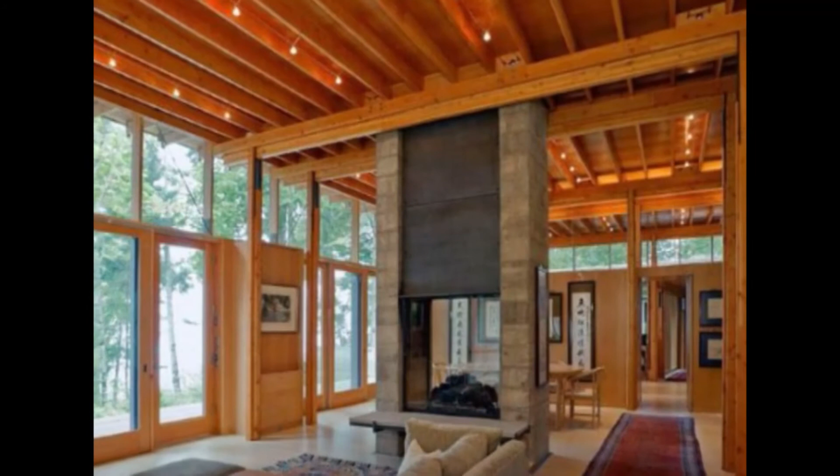Preparation and application of coating is an important industrial activity in the modern world. You can see exterior and interior of any building, vehicle, and substances of daily use are coated.

In this lecture, we will be learning about the unit of surface coatings: its historical background, importance, types of surfaces which are coated, objectives of surface coatings, and various types of coatings which can be classified as conversion coatings, thermal coatings, metal coatings, deposition coatings, and organic coatings. In this particular episode, we will be discussing up to metal coatings and its important characteristics.

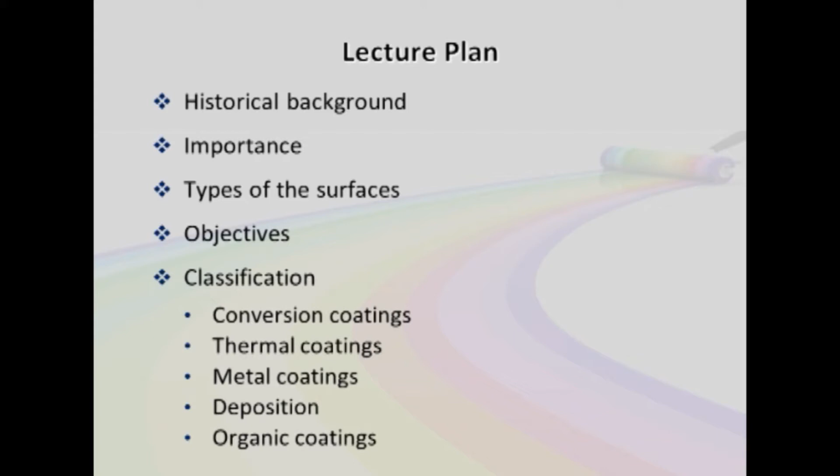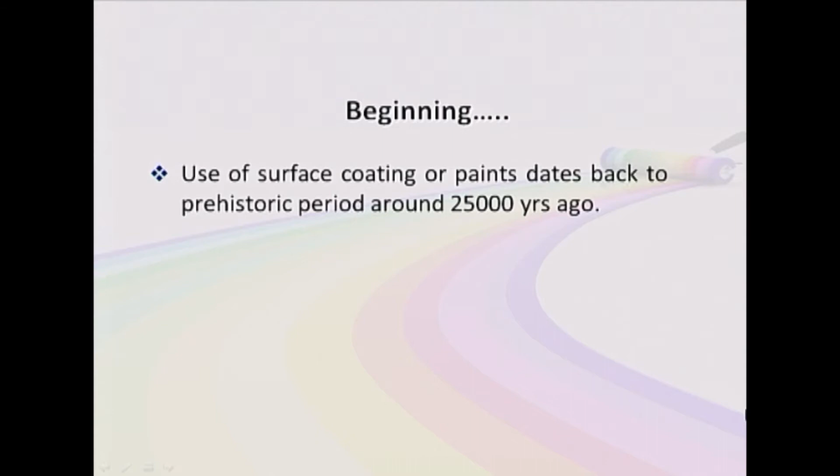Use of surface coating or paints dates back to the prehistoric period. It was around 25,000 years ago when primitive humans used salts of iron, manganese, burnt wood, and chalk mixed with animal fat for expressing their art on the walls of caves.

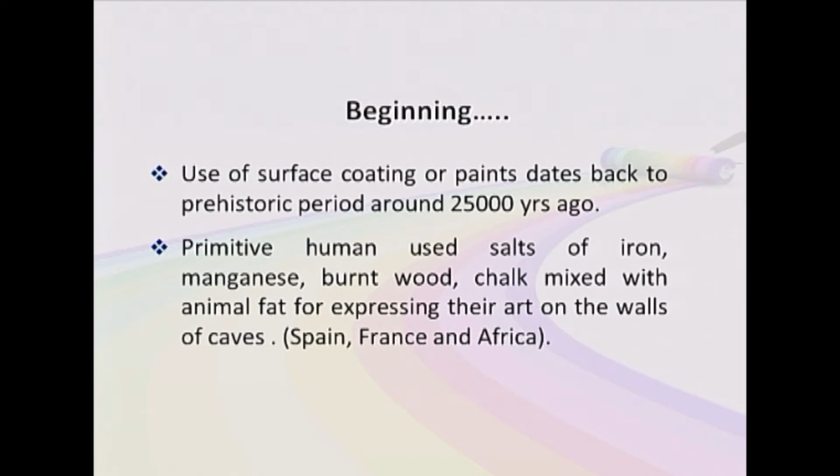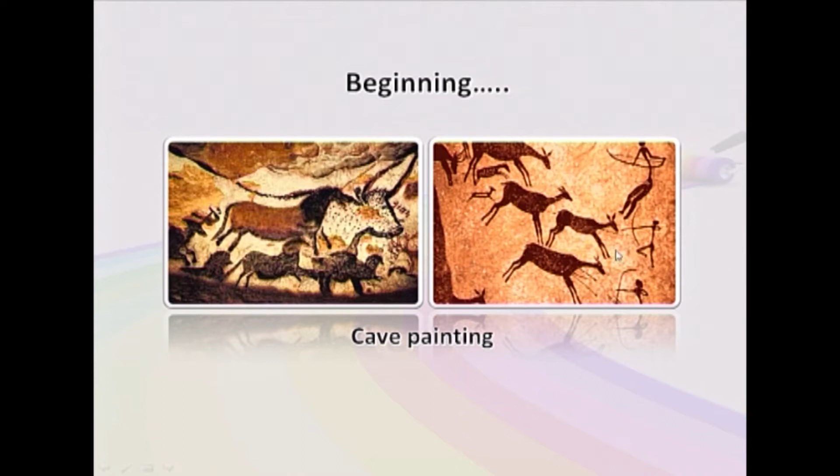In Spain, France and Africa, many such paintings have been found where they decorated walls of caves by drawing animals they were hunting. Here we can see the variety of colors, brown, red, yellow and so many shades they have used for decorating the walls of the caves.

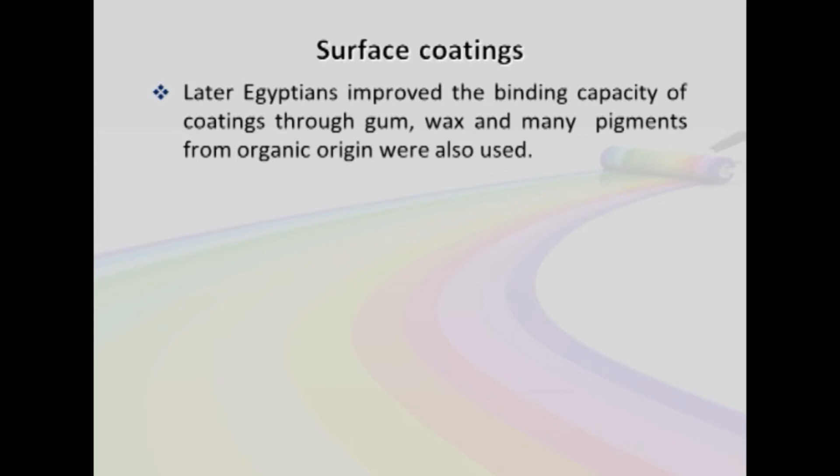Later, Egyptians improved the binding capacity of coatings through gum, wax, and many pigments from organic origins were also used. It was around 600 BC to 400 AD when the Greeks and Romans further appreciated use of coating for preserving as well as decorative purposes, and use of drying oil in varnishes was introduced.

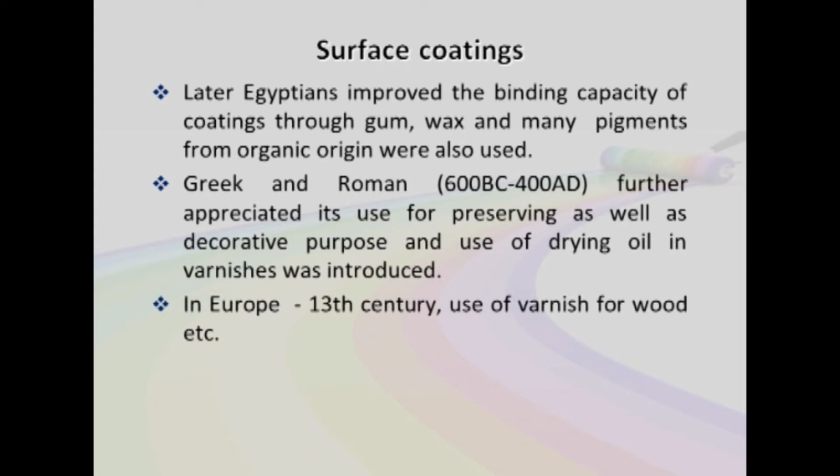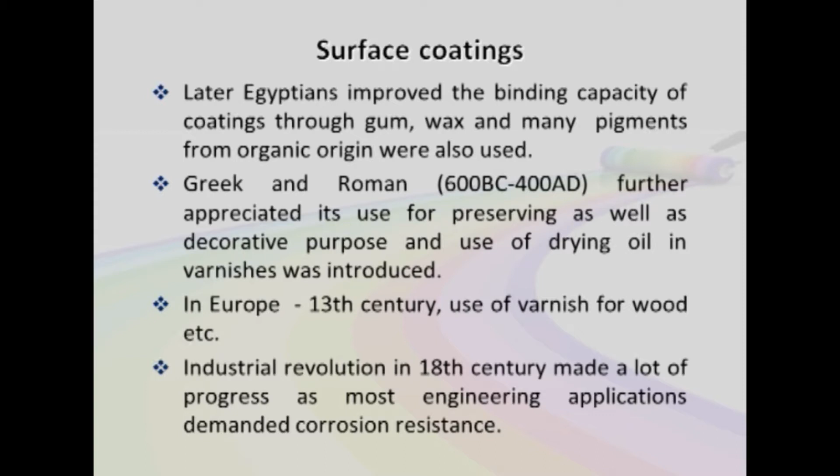In Europe, it was around the 13th century when use of varnish for protection of wood and furniture items was started. The Industrial Revolution in the 18th century made a lot of progress, as most engineering applications demanded protection from the environment due to the problem of corrosion.

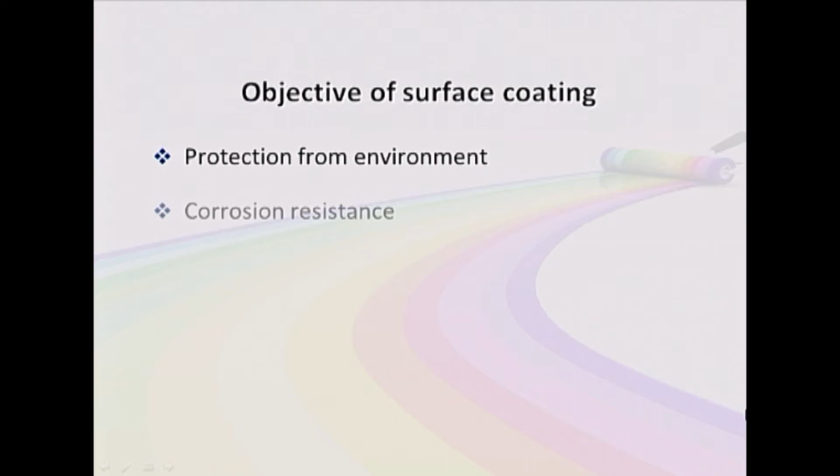Now we can identify the basic objectives of coating any surface. First of all, the primary aim is to provide protection from the environment and thus corrosion resistance. Next is adhesion or binding—for any coating, it should be properly bound on the surface.

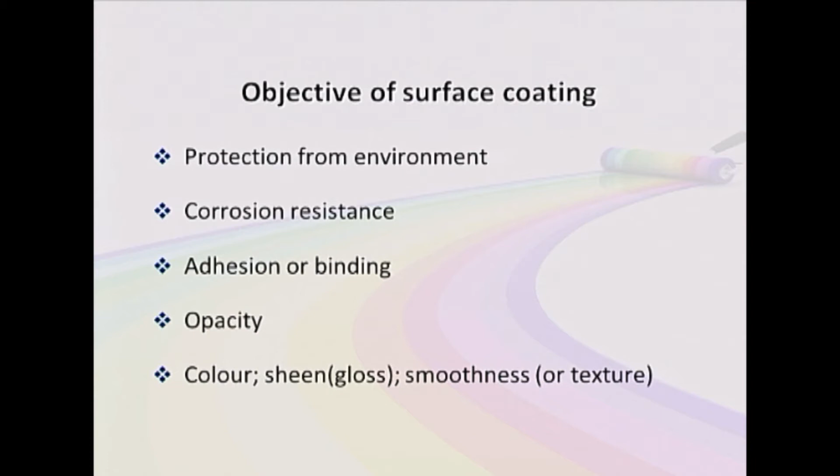It should be opaque, it should provide color, smoothness and gloss to the surface to become attractive. It should also provide specific mechanical and physical properties such as wear resistance, electrical properties, thermal insulation and oxidation resistance. These are very important characteristics which should be present in the coating.

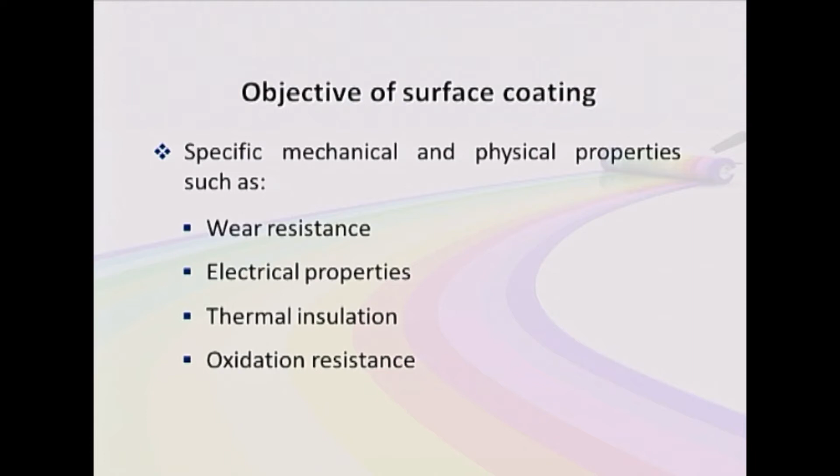Now, factors which affect selection of any coating are the type of the substrate. If our substrate is metallic, then selection will be different, and if our substrate is made up of wood or plastic, then it will be different.

Next is the objective of coating—we want to coat a surface just for the purpose of protection, or for decoration, or it may be for both. Durability is another factor, and finally, the process of surface coating is also a very important factor.

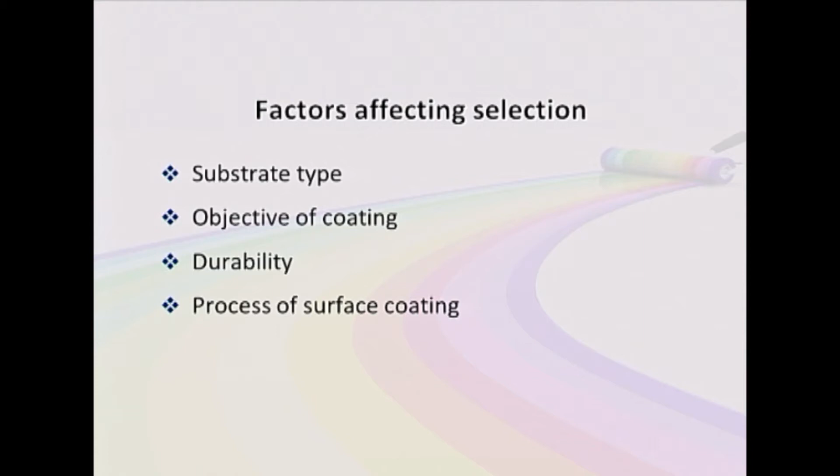Types of surfaces. We can broadly divide various types of surfaces into two categories: metallic and non-metallic surfaces. In the non-metallic surfaces, constructional and many other materials like plastic, wood and many items of daily use are covered.

Surface coatings can be classified into many categories. These are some of the important categories.

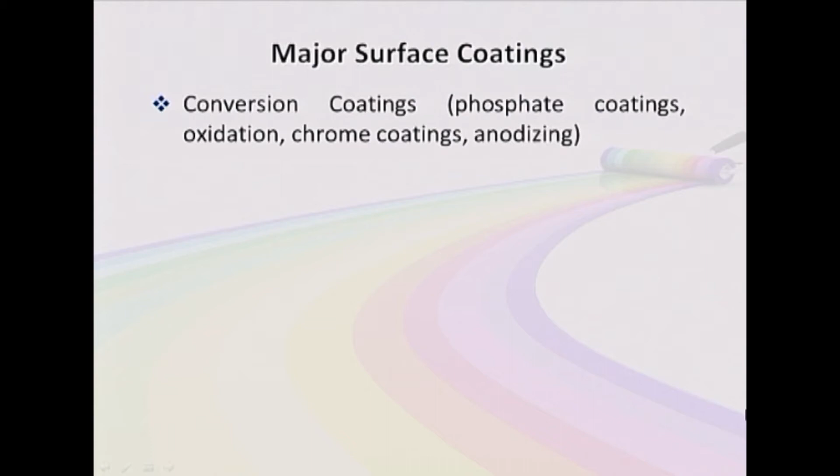Conversion coatings—this can be divided into phosphate coating, oxidation coating, chrome coating and anodizing. Next is thermal coating, which can be divided into diffusion, carburizing, flame spraying, etc.

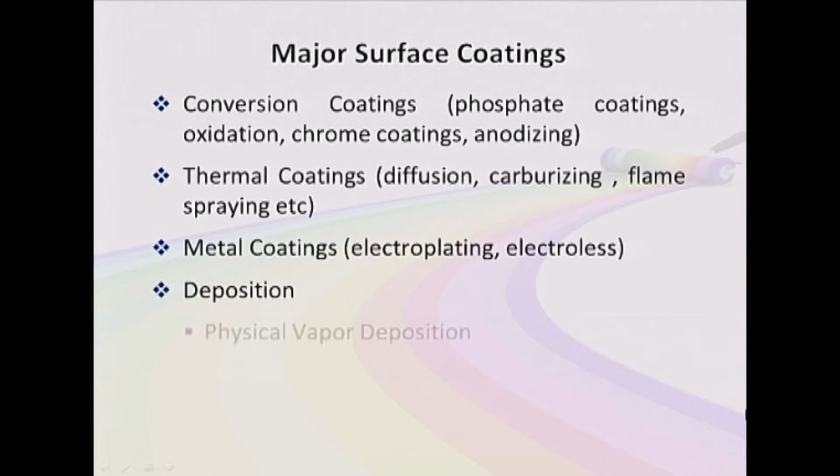Next is metal coatings, which may be done by electroplating method or by electroless plating method, where electrical energy is not required. Deposition coating can be divided into physical vapor deposition and chemical vapor deposition. And finally, a very important category, organic coatings, such as paint, enamel and many more types of paints.

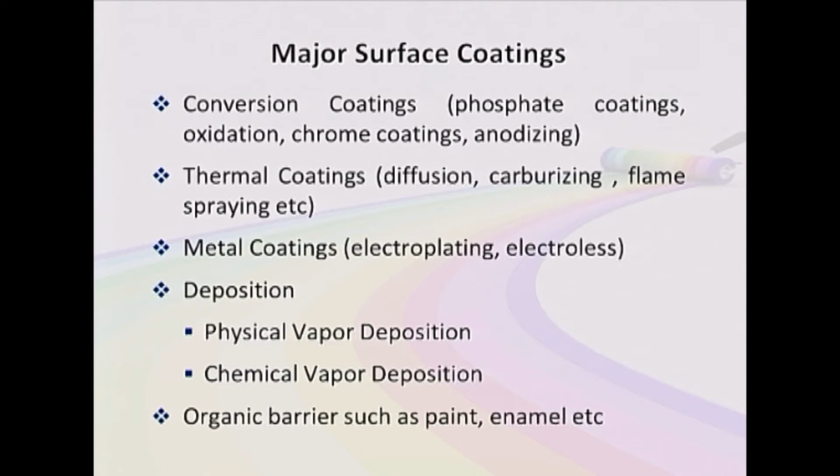Now coming to the first category, that is conversion coatings. These are basically inorganic surface barriers produced by chemical or electrochemical reactions brought at the surface of the base metal. These serve as an excellent base for paints, lacquers and oils.

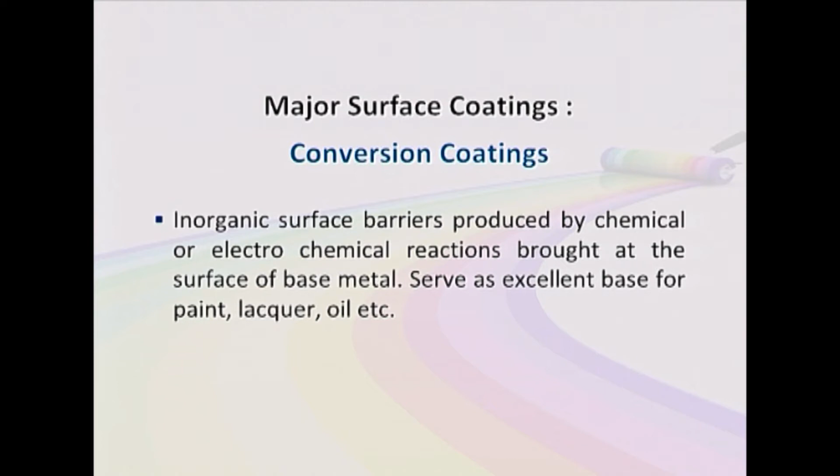Chemical reaction of the base metal with phosphate of iron, manganese or zinc with phosphoric acid causes growth of a crystalline layer on the surface of the base metal. Now depending upon the type of phosphate selected, an iron, zinc or manganese phosphate layer is formed.

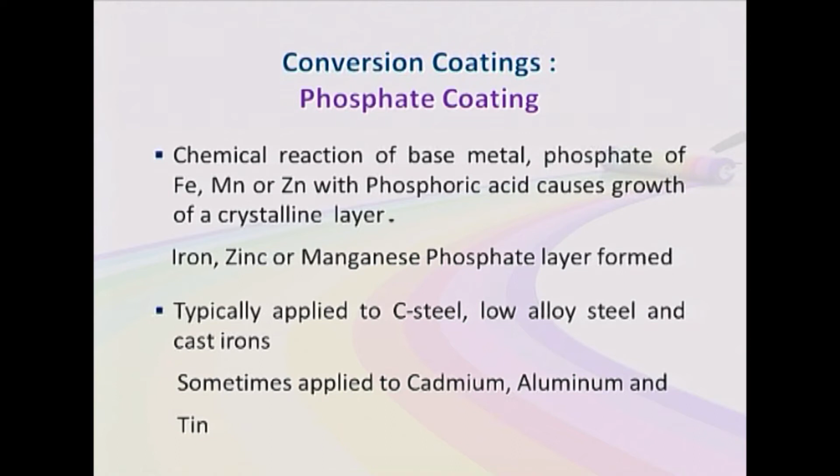This type of coating is typically applied to carbon steel, low alloy steel and cast irons. It is sometimes also applied for the protection of cadmium, aluminium or tin. In phosphate coating, the layer we get is typically very thin, about 2.5 millimeter, and usually grey in color.

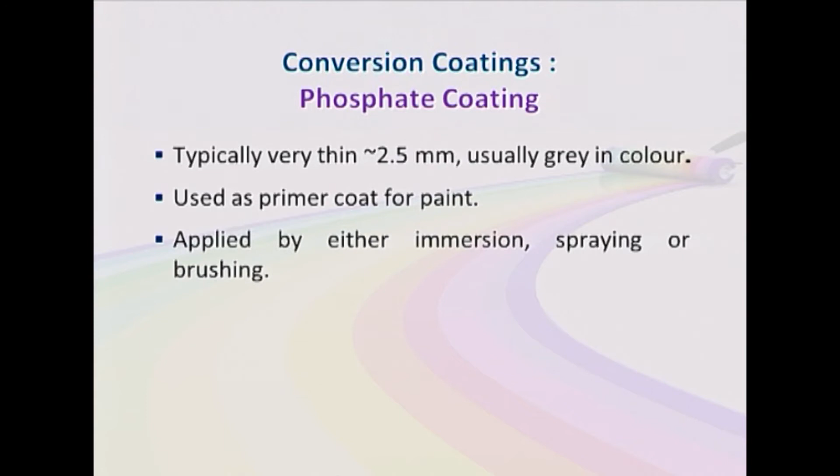This type of coating is used as a primer coat for paints. This can be applied by either immersion method or by spraying or brushing.

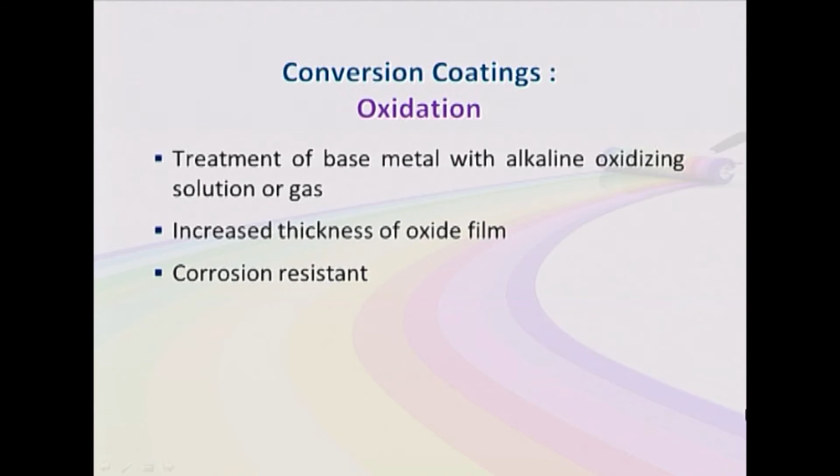Next category of the conversion coating is oxidation coating. Here, treatment of base metal with alkaline oxidizing solution or gas is done. We get increased thickness in comparison of phosphate coating. This coating is corrosion resistant, hence protective. This serves as a good base for paint or oil, but it has less absorptive power than phosphate coating.

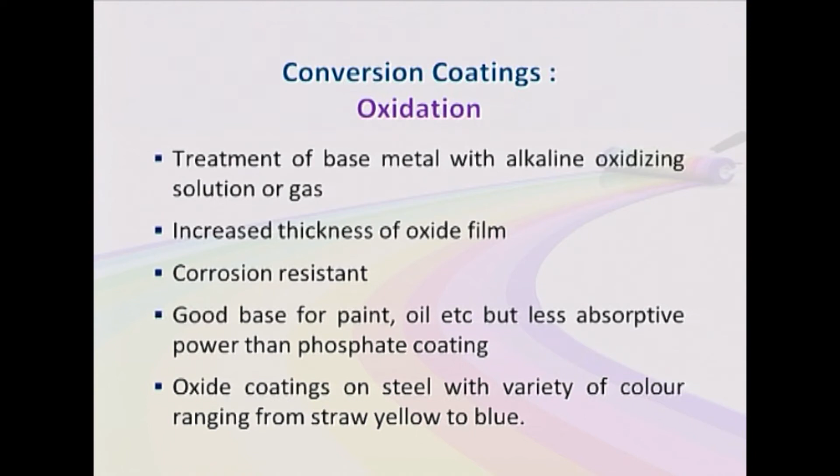Oxide coatings on steel with a variety of color ranging from straw, yellow to blue are obtained. Next is the chrome coating.

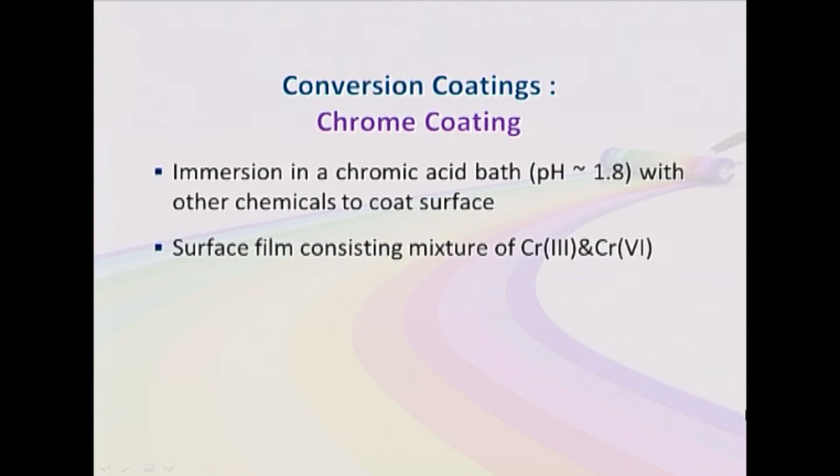Immersion in a chromic acid bath with other chemicals to coat the surface is done. This coating is done in strongly acidic conditions, that is in the pH range of 1.8. Then a surface film consisting of a mixture of chromium in the oxidation state of 3 and oxidation state of 6 is obtained. As we know, chromium in the oxidation state of 6 is known to be carcinogenic. So nowadays alternatives are being found out, and molybdate chemicals are currently treated as the best substitute for coating of aluminium.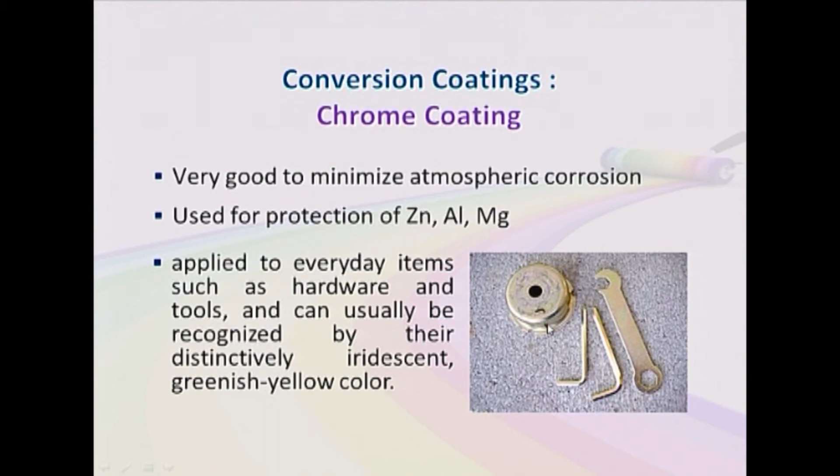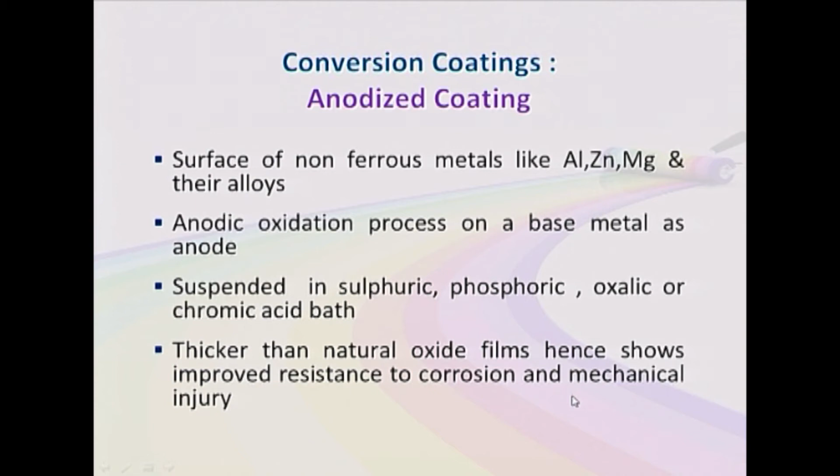Next category under the heading of conversion coatings is anodized coatings. Here the surface of non-ferrous metals like aluminium, zinc, magnesium and their alloys are coated. In this method, an anodic oxidation process on a base metal is followed and the base metal is treated as anode. The base metal is suspended in a sulfuric, phosphoric, oxalic or chromic acid bath, and we get a thicker than natural oxide film, hence shows improved resistance to corrosion and mechanical injury.

Next category after conversion coatings is thermal coatings. In the thermal coatings, again it may be of 4 types: surface heat treatment, diffusion coatings, hot dip coatings and metal spraying.

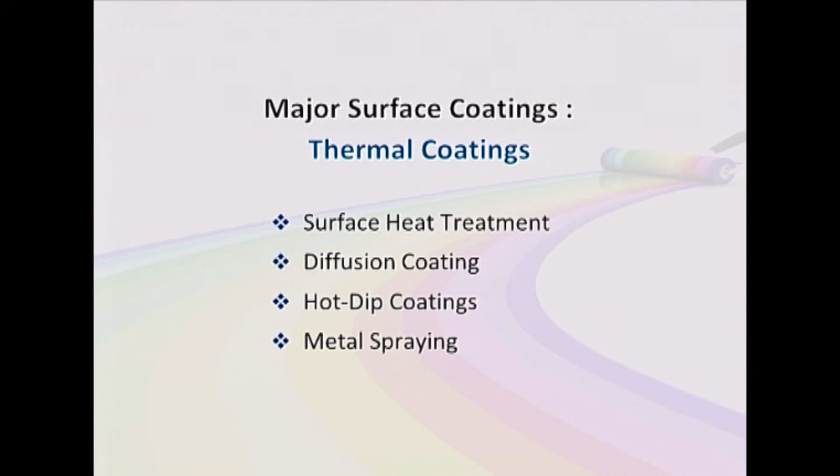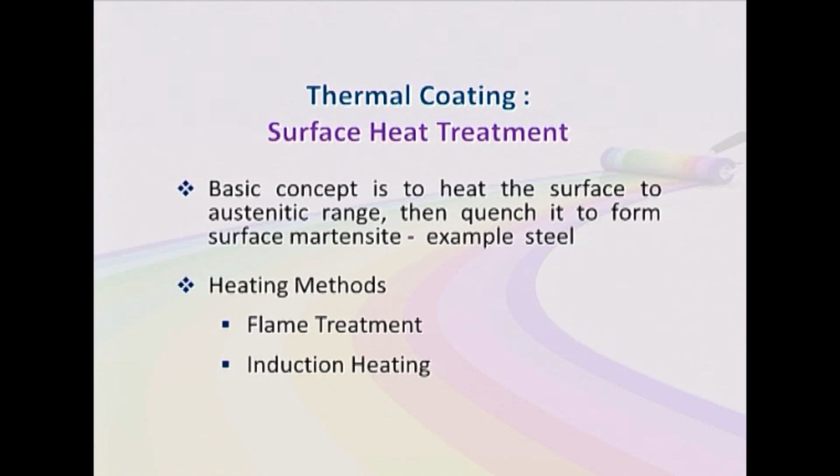First of all, surface heat treatment. As the name suggests, in this method the basic concept is to heat the surface of the substance to the austenitic range. Then it is quenched to form martensite surface. Here steel is taken as an example. Various types of heating methods can be used. One is flame treatment and the other is induction heating.

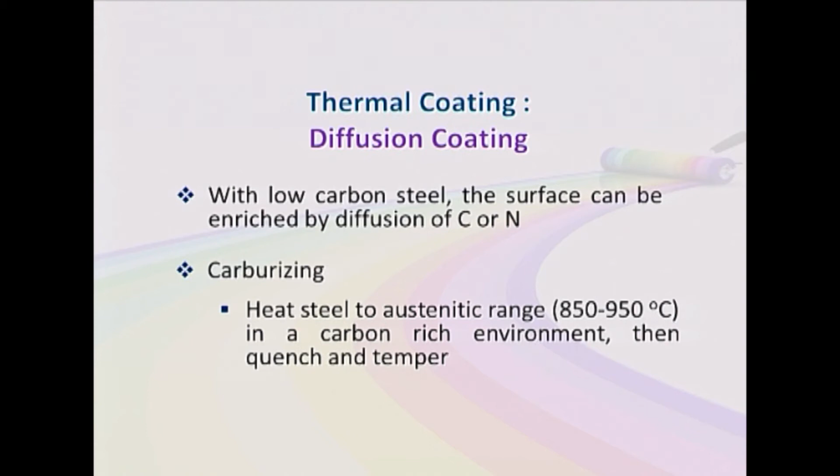Next, under the heading of thermal coating is diffusion coating. In this method, with low carbon steel substrate, the surface can be enriched by diffusion of carbon or nitrogen. Now, diffusion of carbon, carburizing. In this method, steel is heated to austenitic range, which is from 850 to 950 degrees Celsius in a carbon rich environment. Then it is quenched and tempered.

In the nitriding method, nitrogen is diffused into steel and it occurs around a temperature range from 500 to 560 degrees Celsius, and a very hard thin surface is formed. This type of coating is good for chromium, vanadium, tungsten and molybdenum steels.

Next is metal diffusion. Here metals such as chromium or aluminium are diffused into the surface to form a corrosion resistant layer. In case of aluminium, it is used to increase the high temperature corrosion resistance of steels and superalloys.

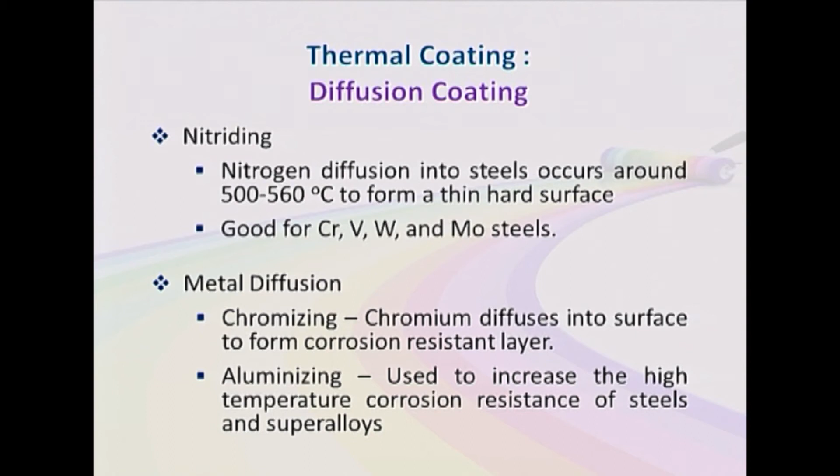Next type of thermal coating is by hot dip method. These coatings are also used for corrosion protection. First of all, galvanizing. Parts of the substrate are dipped into a molten zinc bath. A layer of zinc carbonate will be formed, and this type of coating is used for protecting steel.

Galv-annealing: galvanized parts are then heat treated to around 500 degrees Celsius, so that an iron zinc intermetallic state is formed. This is used for metals that need to be spot welded, to protect the copper electrode from alloying with zinc and reducing its life.

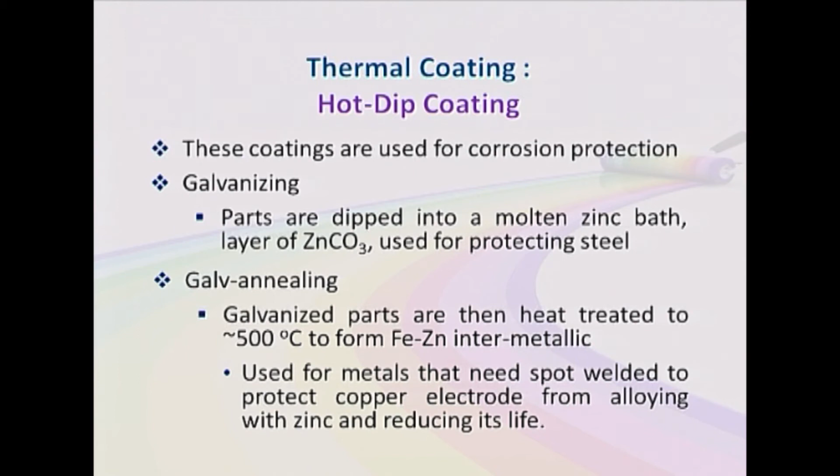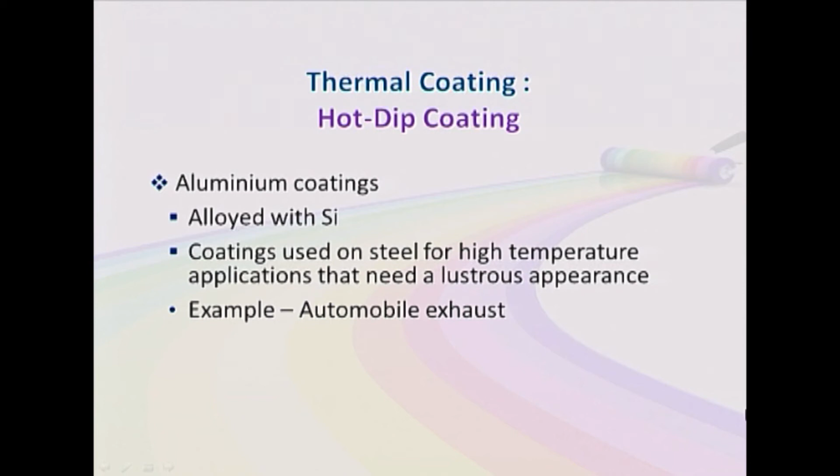Next type is aluminium coating by the hot dip method. Here it is alloyed with silicon. This coating is used on steel for high temperature applications that need a lustrous appearance. Automobile exhaust is an important example in this category.

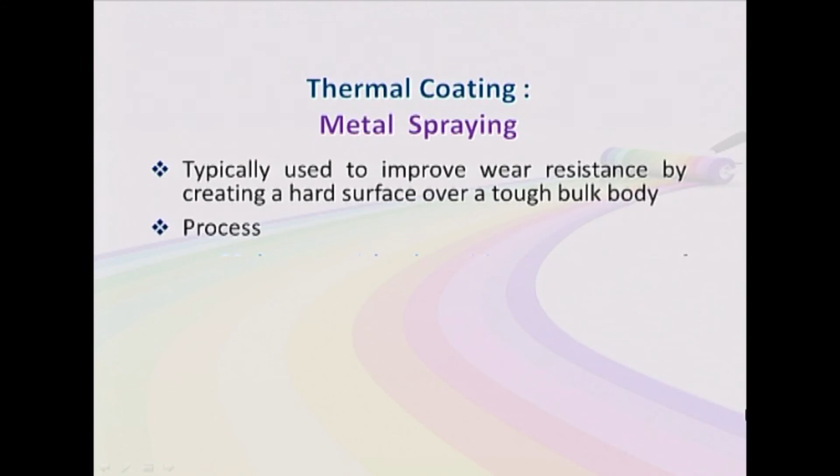Next type of thermal coating is by metal spraying method. This is typically used to improve wear resistance by creating a hard surface over a tough bulk body. In this process, molten particles are deposited. A stream of molten metal particles from a spray gun are deposited on the surface of the substrate.

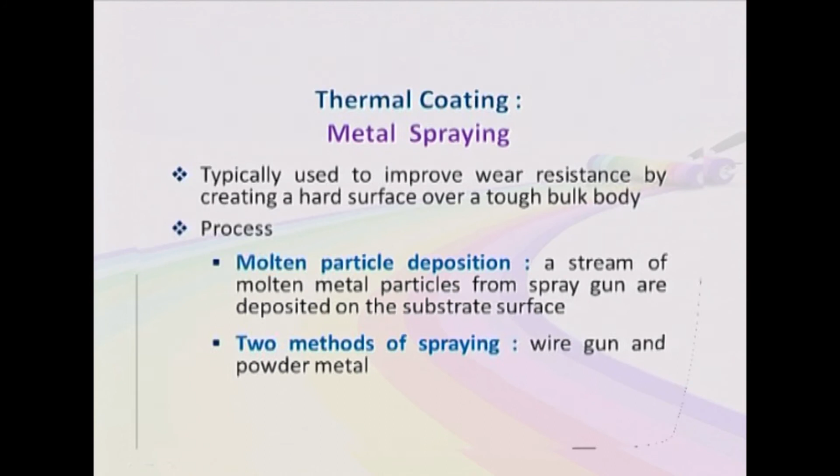We can deposit the stream of particles by two methods: wire gun and powder method. In the wire gun method, metal wire is melted in an oxyacetylene flame, and then it is atomized by a blast of compressed air. This method is widely used for common metals.

Another method is the powder metal method. Here finely divided powdered metal is heated, then passed through the flame of a blowpipe. It results in clouds of molten globules, which are then adsorbed on the base metal surface. This method is used for low melting metals like zinc, lead and tin.

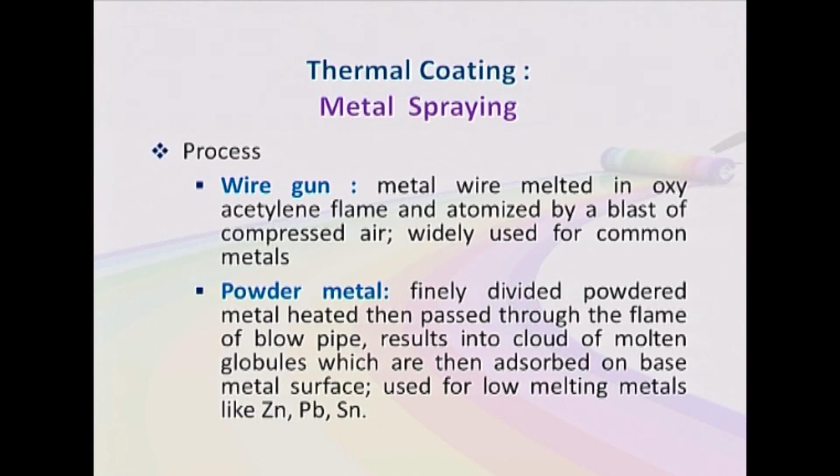In the metal spraying method, first the surface undergoes a bonding process with the molten particles, and we get a continuous but porous coating. Since the coating is porous, we need to seal the surface, so sealer oil or paint is applied to provide smoothness, giving greater speed of working. This process is very easy for application, but adhesion strength is less than hot dipping or electroplating methods.

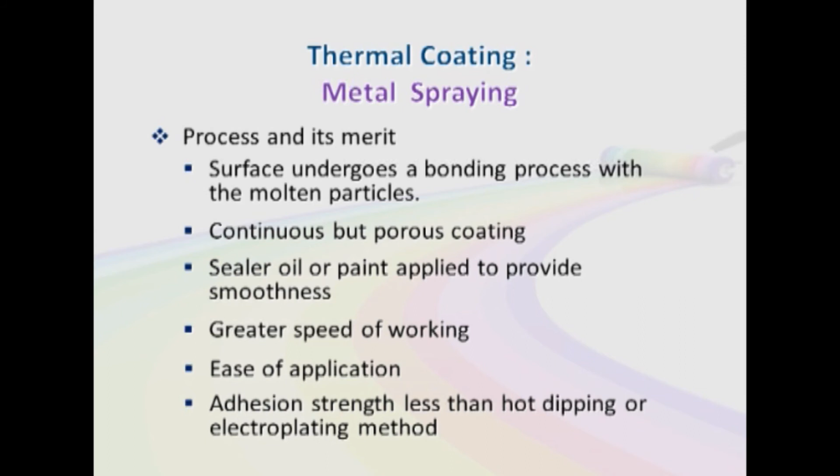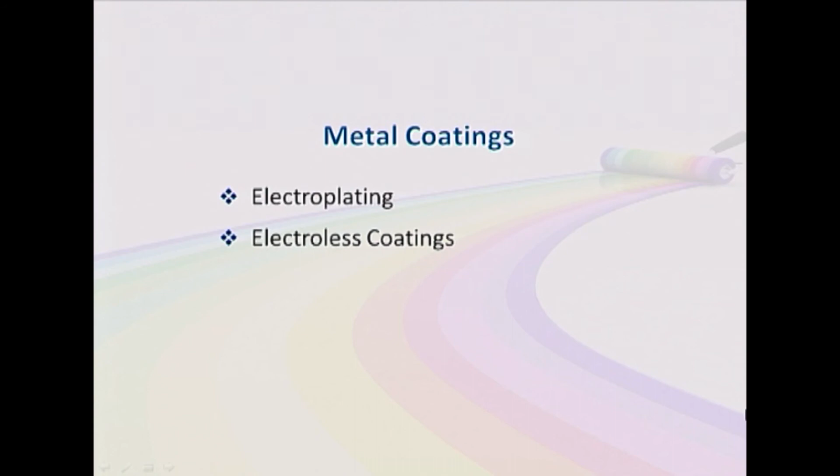Next category is metal coatings. In metal coatings, we can further divide into electroplating, electroless coating where electrical energy is not required, and metallizing of plastics and ceramics.

First, electroplating. Objectives of electroplating of metals: this is used to increase wear and corrosion resistance of the metal. As we know, the surface of metals gets corroded very easily, so this method is very useful to provide corrosion resistance, improve physical appearance, impart hardness, and increase commercial value.

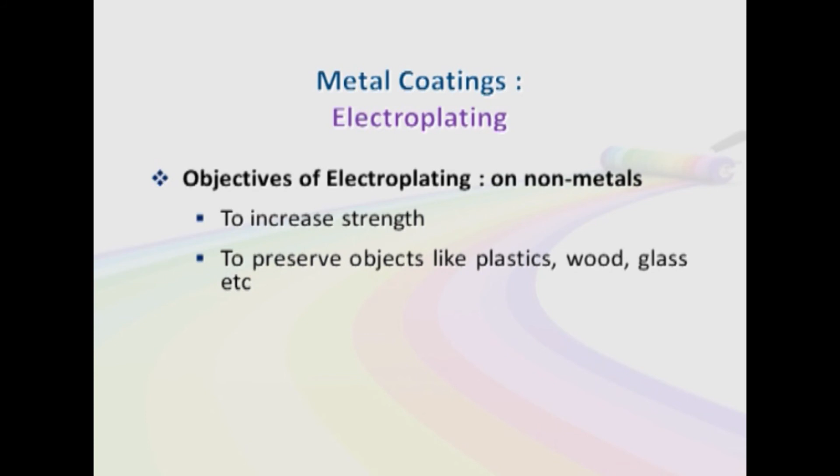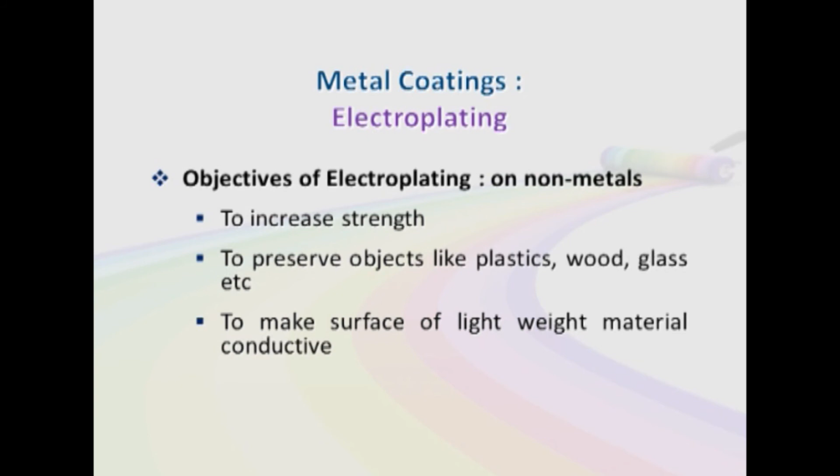Now, if we perform electroplating on the surface of non-metals, the objectives are quite similar: to increase strength of the non-metal, to preserve objects like plastics, wood, glass, etc. from the effects of environment, and importantly, to make the surface of lightweight materials conductive. As we know, non-metals are bad conductors of electricity, so by coating their surface through electroplating, we can make them conductors.

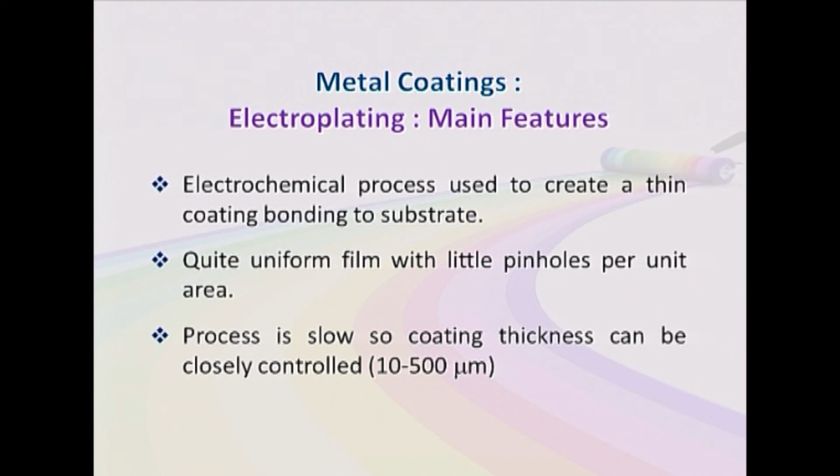Main features of the electroplating method: an electrochemical process is used to create a thin coating bonded to the surface of the substrate. A quite uniform film with very little pinholes per unit area is obtained. The process is slow, so coating thickness can be closely controlled, ranging from 10 micrometers to 500 micrometers. So we can see how thin a film can be obtained from this method.

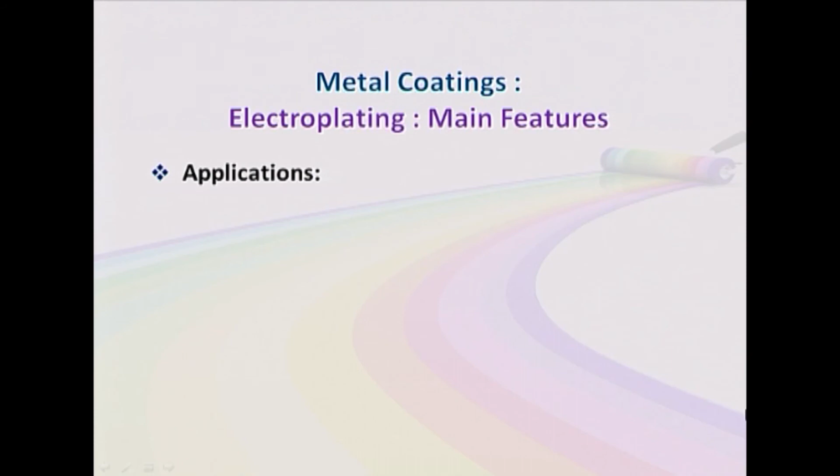Applications of the electroplating method. Here are some important applications. Tin and zinc are deposited on the surface of steel for further working. Zinc and cadmium are deposited on parts for corrosion resistance. Cadmium is toxic and therefore cannot be coated on appliances used in food applications. Copper is deposited for electrical contacts.

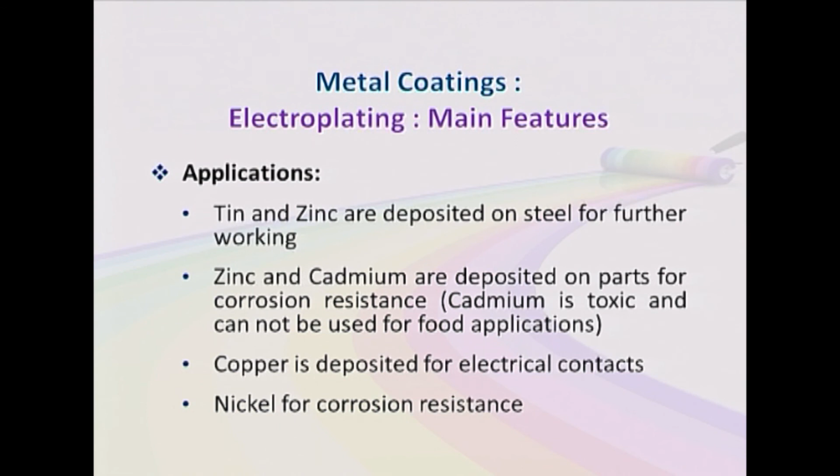Nickel is used for corrosion resistance. Chromium can be used to impart wear resistance to dies and reduce adhesion to workpieces such as aluminium or zinc. Precious metals can be electroplated for decorative value and for electronic devices.

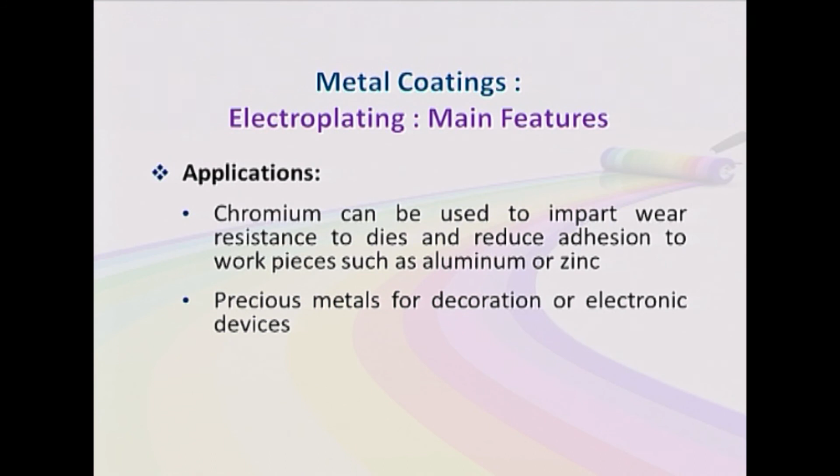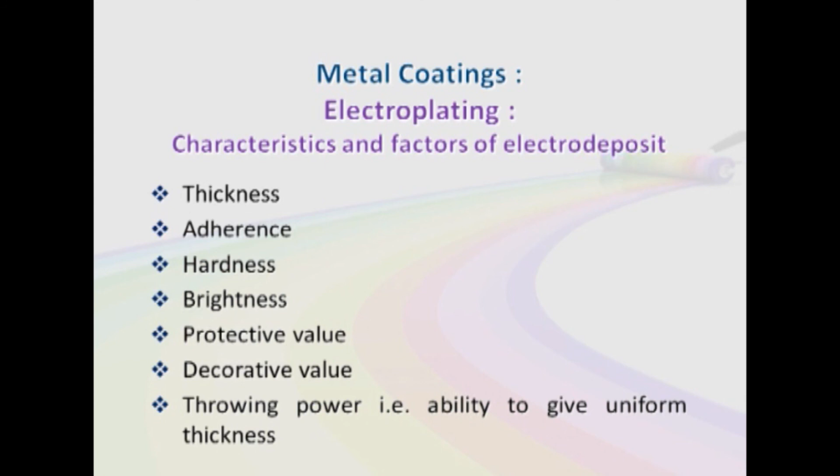Some important characteristics and factors to pay attention to in electroplating are: thickness of the coating, its adherence - it should be properly bound with the substrate, hardness - it should make the surface hard so it becomes tough, it should look bright and provide gloss, protective value, decorative value, and throwing power. Throwing power means the ability to give uniform thickness.

Electroplating is done in the temperature range from 35 to 60 degrees Celsius, so we can see it is near room temperature or slightly warm conditions in which good electroplating is obtained. Cleaning of the substrate is very important - if the surface is not properly cleaned, the coating will not be proper.

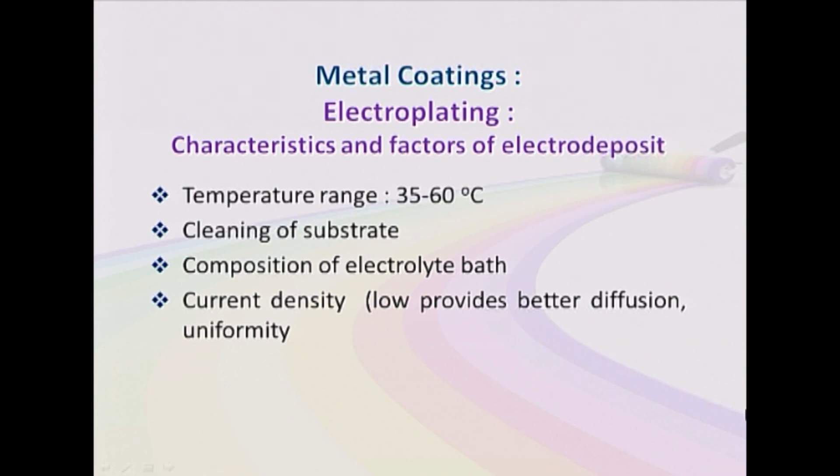Composition of the electrolyte bath - many conditions, types of salts chosen, and their concentration affect the electroplating. Current density - low current density provides better diffusion and we get a uniform layer. pH of the bath should not be too high or too low. At lower pH, meaning acidic conditions, a burnt deposit is obtained, and at higher pH, hydroxide ions get deposited on the surface.

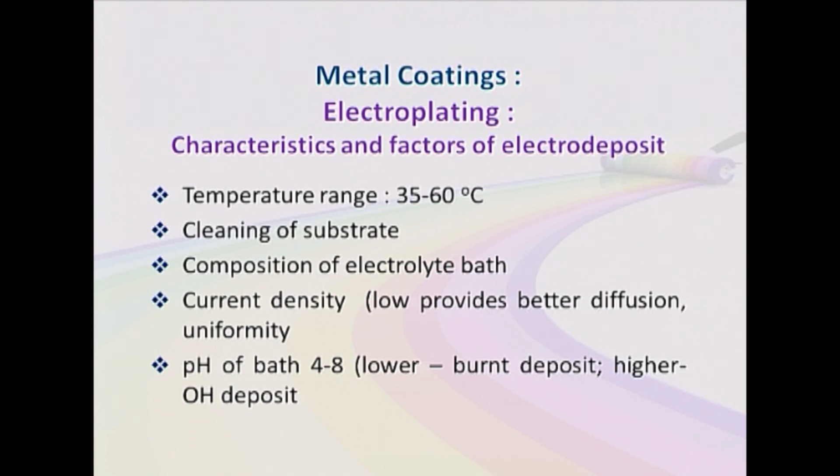Now at the end we will revise once again what we have learnt in this lecture. First, we went through the historical background of surface coating, starting since the prehistoric period, types of surfaces which can be coated, and objectives of surface coating - it can be for protective purpose, decorative purpose, or both. Then we learnt the classification: conversion, thermal, metal coatings, deposition, and organic coating.

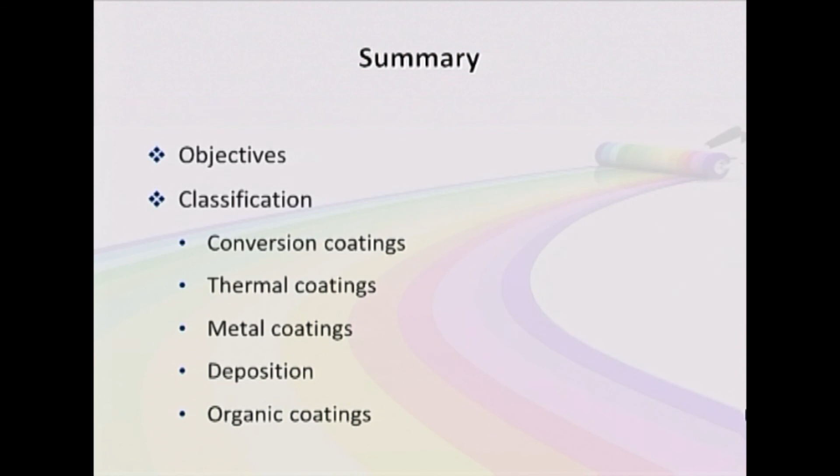In this particular lecture we have covered up to metal coatings. Various conditions and experimental details of metal coatings, especially electroplating, we will learn in the next lecture. Thank you.